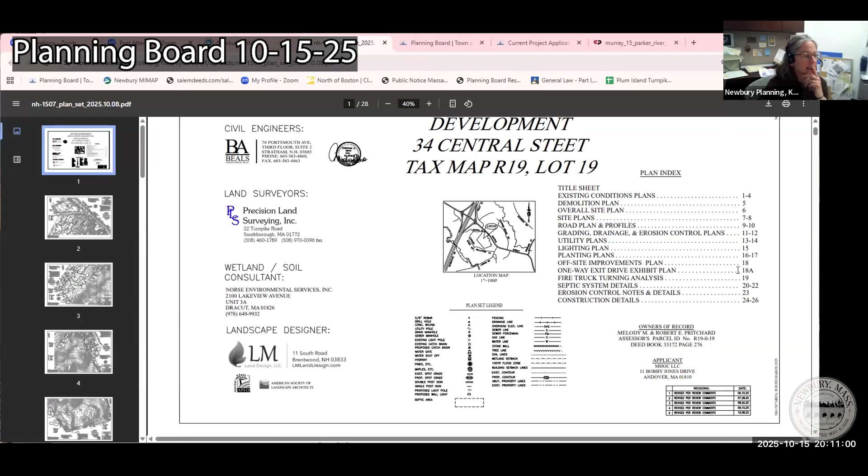Sheet 18A. I'll enlarge it when we get there. So this is the sheet that shows...

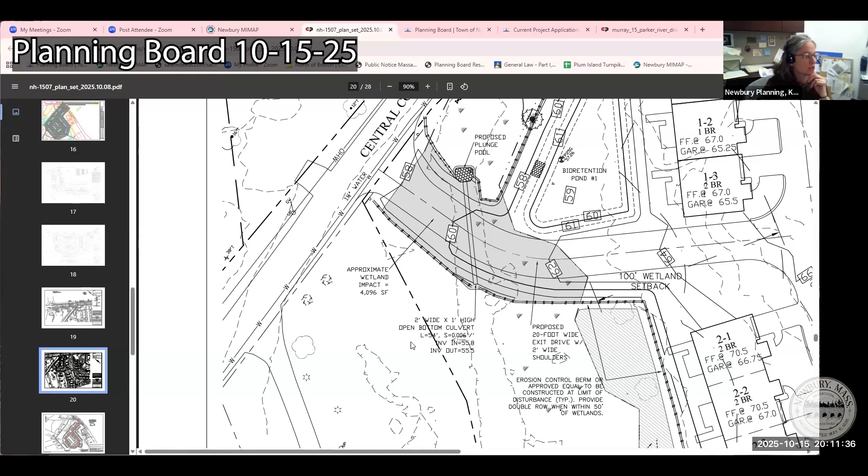The exit across the wetland. And what I see that you've been referring to, Jerry, is probably right here: a 2 foot wide by 1 foot high open bottom culvert. Yes, open bottom culvert, so the critters can get through there without having concrete on their toes.

So I reviewed these plans and showed this page with the fire chief today, and he was going back to discuss with his deputy chief and his other colleague who reviews plans. So I can point that out. To Jay's point, it doesn't answer the question of the weight.

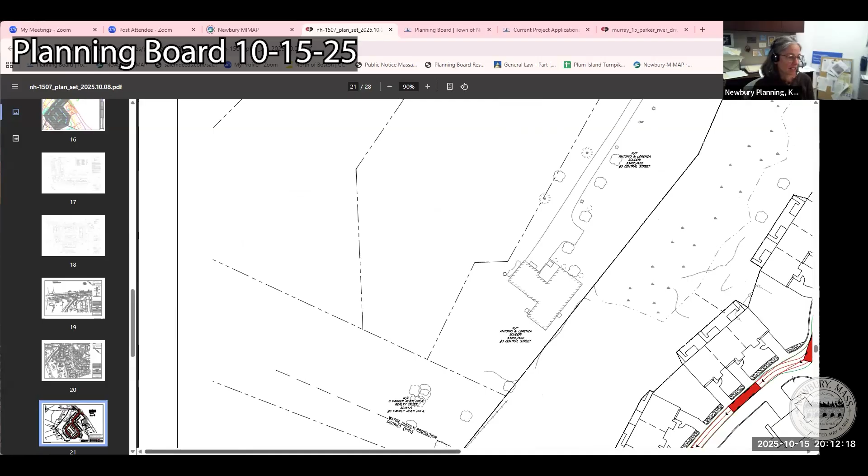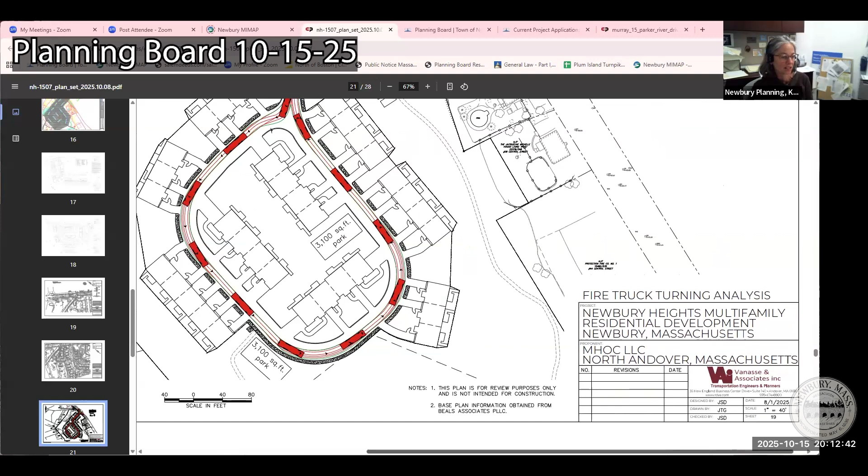This plan, which is the next page, is what we asked last Thursday to be redrawn to include that one-way exit road we were just talking about, which comes across here and comes out to Central Court. So this was done by your traffic consultant. It includes the original access, turning radius. This is what we're looking for: the one-way exit and for Central Court, for the realignment and the intersection with Central Street for the fire trucks.

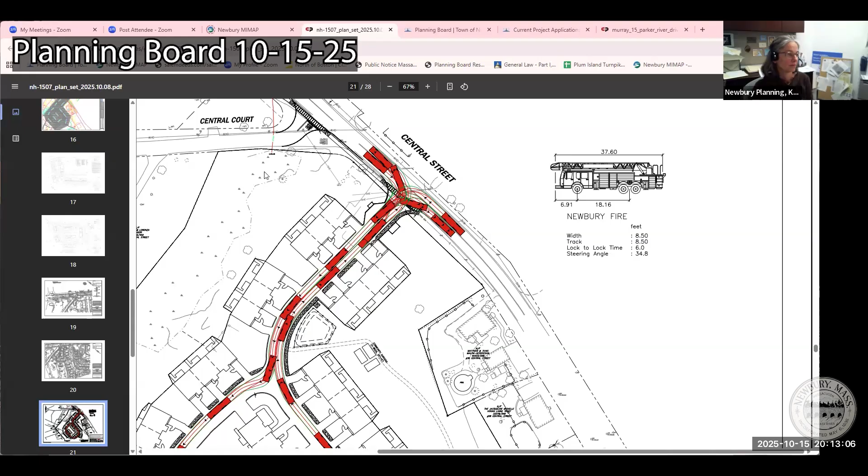So it's kind of a merging of these 2 pages is what we've requested.

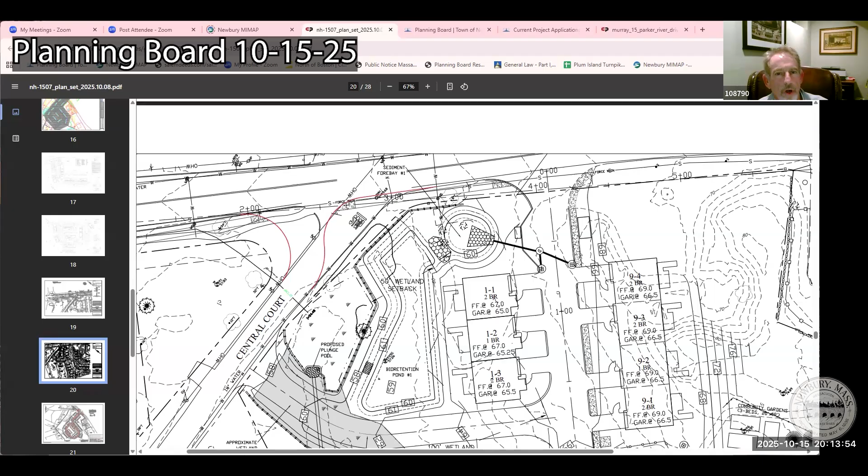Well, could we ask—could we have to go to the Conservation Commission to get permission across the wetland? I mean, to revise all the plans to show a wetland crossing when the Conservation Commission could possibly not agree with a wetland crossing seems to be excessive engineering work. Could we make that a condition that once the Conservation Commission approves the wetland crossing, we will obviously update all the plans to show that one way in and out of the site? I'm just thinking that to speed up the process a little bit.

Well, I think part of that problem, and I respect what your request is, but I think part of the problem is the fire chief didn't want to review it without the information. So that's what we've been waiting for, is the fire chief's review, and he's been waiting for the information. Yeah, so it's classic chicken and the egg here, right? And the fire department—I think, in my mind, and as a resident and a board member, I think it's appropriate to provide the data really on weight and turning, to the appropriate folks that are going to be keeping this place safe.

And that's the fire chief. So I don't know, Jerry, what the cost would be. We certainly don't want you or any other applicant to expend money, good money after bad, but is this a large cost to you?

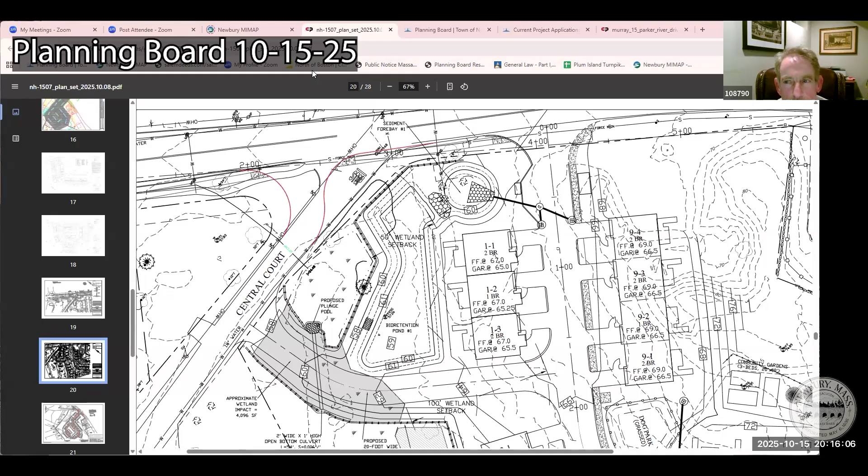It's not necessarily the cost, it's more a timing issue. So if the board—we're gonna acquiesce to whatever the board would like to do, obviously. We're not sure that conservation will approve this, so to add it to all the plans, and then if the Conservation Commission doesn't approve it, then we just did all that work for naught. So it's more of a timing thing for us.

If I could, Jerry, the option B that we've been talking about is actually the planning board's option A. So our feeling is this is what we would like to see, and then go to conservation. If they say no, that it can't, they'll have it all engineered. They'll be able to take a look at it, they'll see what it's about. Then you could come back to us and say, hey, listen, it doesn't fly with them. But from our perspective...

We lost Pete for a minute there. ...where we're coming from, and so that's why we're asking for this. Well, and I don't know—Pete, we lost you about 30 seconds ago. It's probably best that you lose me.

I would disagree to that, but I think you were saying at the time we lost you... I guess I lost you.

So, the planning board's option A is actually option B. This is what we would like to see from a safety standpoint. We've heard from the traffic consultants that this is not just an acceptable intersection design, it's an ideal intersection design. So our feeling is this should be engineered and go to conservation as an engineered, complete package. They can look at it and understand where we're coming from. If it fails with conservation once it's all engineered, then you can come to us and say it failed. But our feeling is this is a safety issue, it's in the best interest of the community, and this is where the planning board would like to go. I think we've already agreed to that.